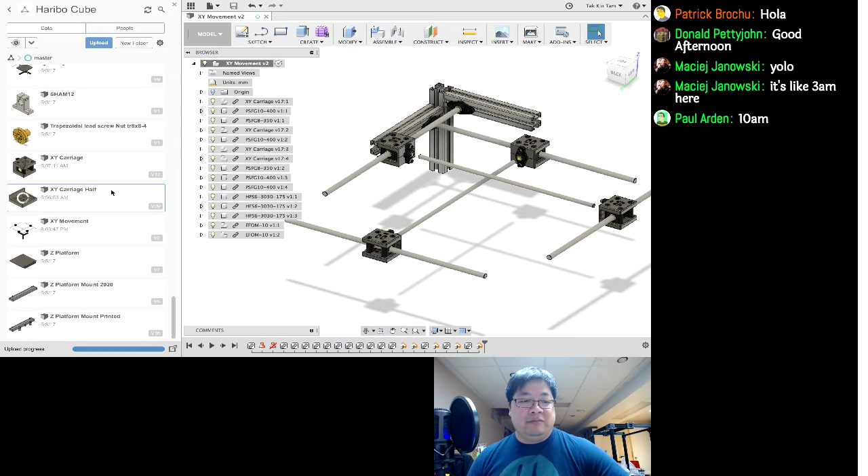I'm hoping that I'll get everything sorted out for Saturday. I made a lot of progress on the design, so hopefully by Saturday, if I can figure out the rest of the problems I've been having, then we can actually see some animations. Saturday would be noon, so it works out for you guys since it'd be dinner time for you, and noon time for the North American guys. So hopefully I'll be getting you guys a better update on Saturday.

One change I did make is on the CSS for the moderators. You'll notice Patrick is a moderator here, so his name is now orange instead of blue. It was dark blue before and you could hardly see his name when reviewing the stream, so I decided to make it orange so it stands out better, hopefully that works.

Let's see if I could have a quick check on who's on. Five, I think that's pretty good, I guess. Didn't really expect too many guys on because it's just kind of a spontaneous stream, right?

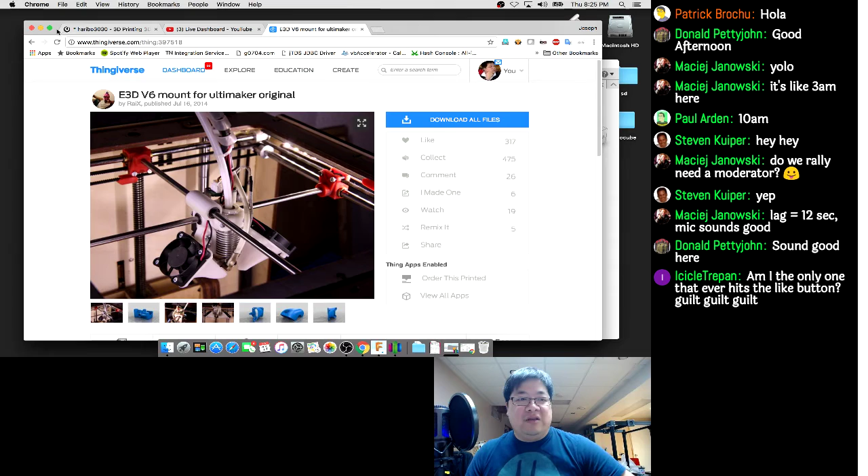I did a lot of work on this last day too, but now that I've started test fitting, I'm finding I need to make the part smaller to get the clearance. But let me go and show you guys what I've done over the last few days.

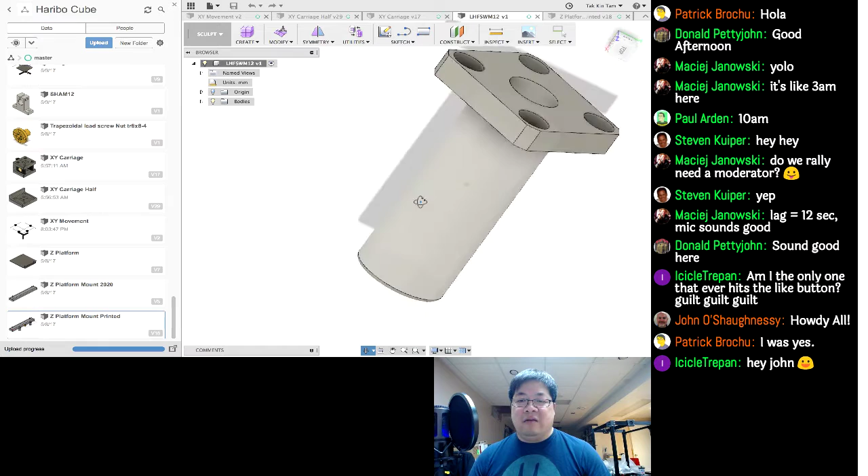I think Pat, or maybe someone else, was asking last time about the bearing on the Z platform mount—specifically about the single length ones. I haven't had time to adjust this yet, but basically we're going to go with this 12 mil double-length flanged bushing/bearing to replace these two.

So the lead screw, the pom nut, and the two bearings are going to be flanged, and we're basically going to use the flange from the bottom to hold the platform up. If you guys look at the MK2 design...

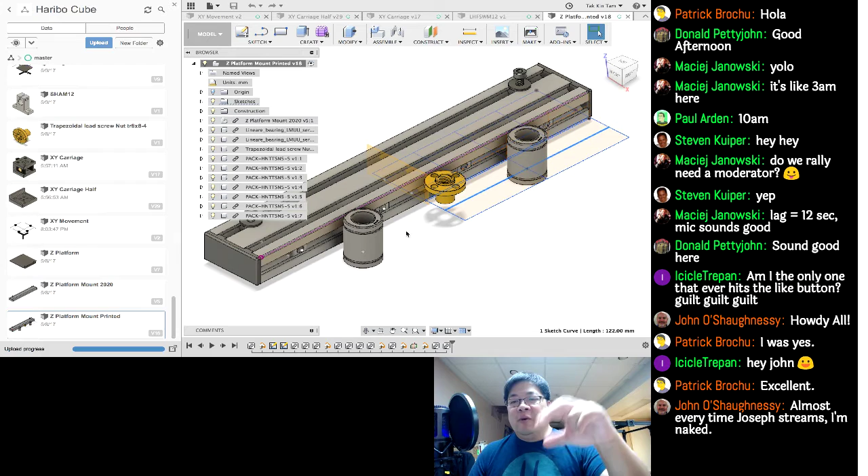John, you're killing me. The MK2 design basically has the bolt going through the top and making contact with a nut, so all the weight of the gantry gets forced onto the two bolts holding it up.

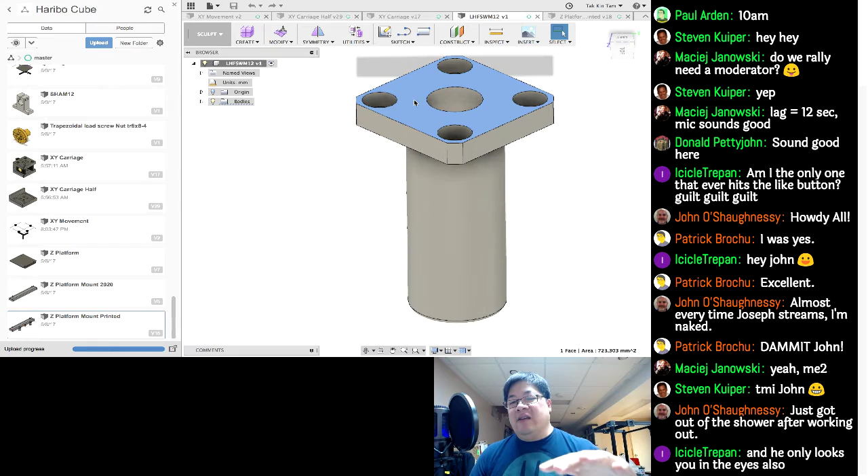In the case of the gantry on the MK2, it's not a big deal—it's not that heavy. But when you have a platform with the heat bed and the weight of the print, just having the bolt on top doesn't really make sense. So what's going to happen is we're going to flip that around, and if you look at the bearing itself, the platform is going to sit on top of the surface so the weight is on the flange, and gravity keeps it in place.

If you think about how the platform works, it starts from the top and slowly descends as the print goes on. So with the flange on the bottom of the platform mount, it's going to hold up the whole platform a little bit better than having it pulled up from the bottom. Right now we have a proof of concept and it seems to work—like I related in our last stream.

I just want to quickly update on the bearing situation. I ordered the bearings from AliExpress just for fitment—most likely it's a fairly standard size, so there's bushing that works in that space as well. It's up to you guys what you want to use, but the mount is going to work for all the different options we have.

So that's the update for the Z platform.

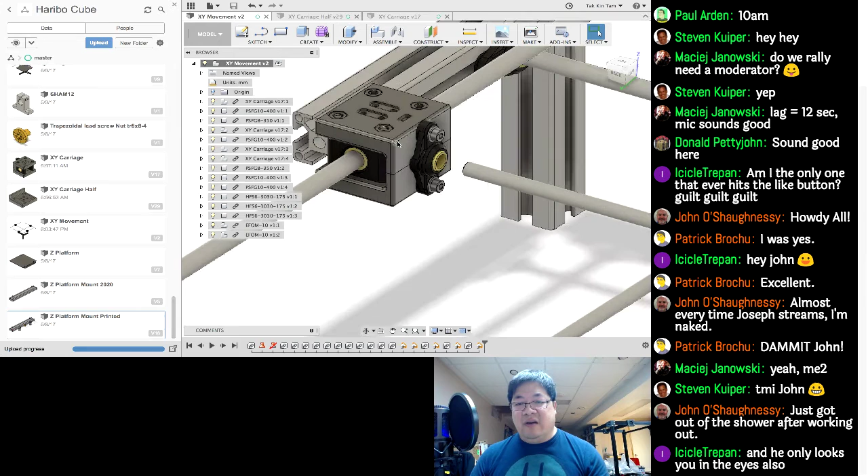I want to go through the design of this, it's going to change. One of the things is I made this part here, the XY carriage, I'm calling it. I drew that out of context, meaning I designed this part first, other than the Z platforms. So I sort of just winged it and said, I like these Misumi holders.

The little ball inside the brass colored ball pivots, so if there's an alignment issue between this ball and this ball here, it will work itself out. So that rod, if the printed part is slightly off, it will still work. It won't bind. That's one thing about these.

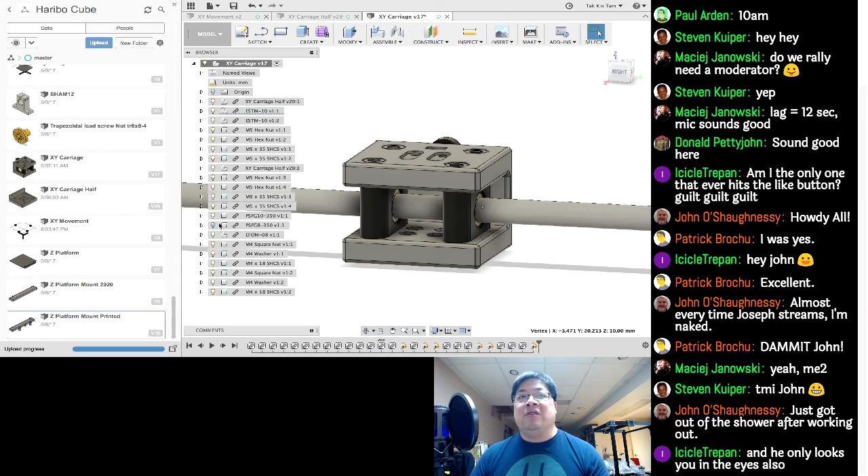The other one was the cross rod. The cross rod here is also on a pivoting bushing. So if that is not perfectly perpendicular, let's say we're off by...

Hey, see you later, man. Yeah, catch up later, it's gonna be recorded anyway.

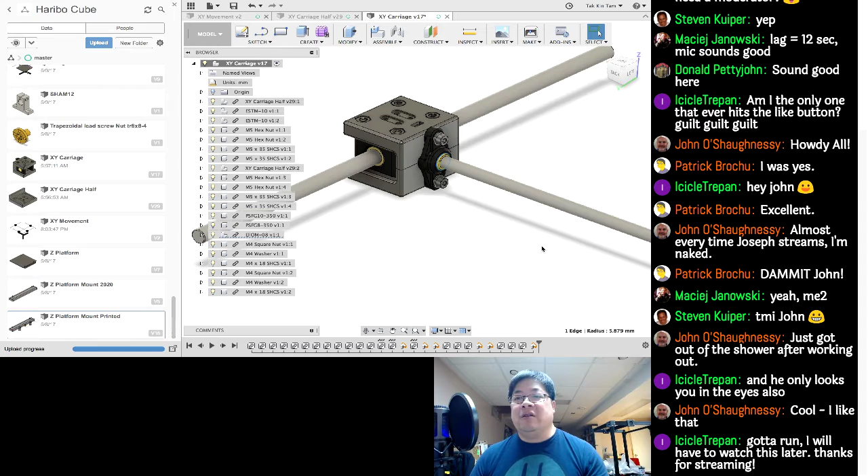So if this rod is not perfectly perpendicular to each other, we're talking about maybe half a degree off, we're still pretty good here.

One of the things with any kind of these ultimaker movements is their major problem is there's too many variables. This rod, I'll show you the picture, but this rod and the one across from it has to be parallel.

The two opposing ones have to be perpendicular, the two crossbars have to be perpendicular, and a lot of times there's gonna be spots where it's not perfectly aligned. Then it starts binding up, and there's a lot of time wasted trying to align all these different moving parts. But by using these pivoting pillow blocks, we sort of move away from that.

So let's just go and hide these rods. You notice that it's a fairly simple part to model. What I did was I made two indentations so that they align that pillow block in place.

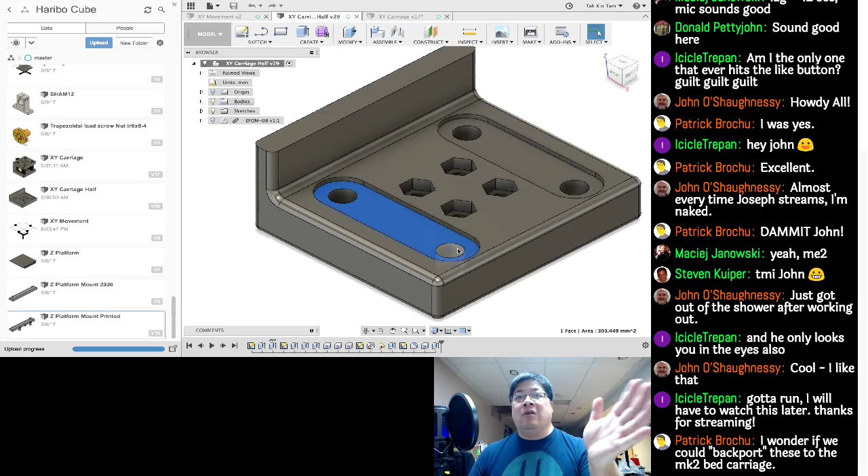One of the problems is they can't make the hole of the bushing holder perfectly 5 millimeter, because then when the bolt goes through it, it'll bind up. So they make it 5.5, which gives about 0.25 play in the bolt itself. If we don't have these alignment indents, you could be going either way, 0.5 millimeter either way. We solve that problem by having the indents to align the blocks themselves.

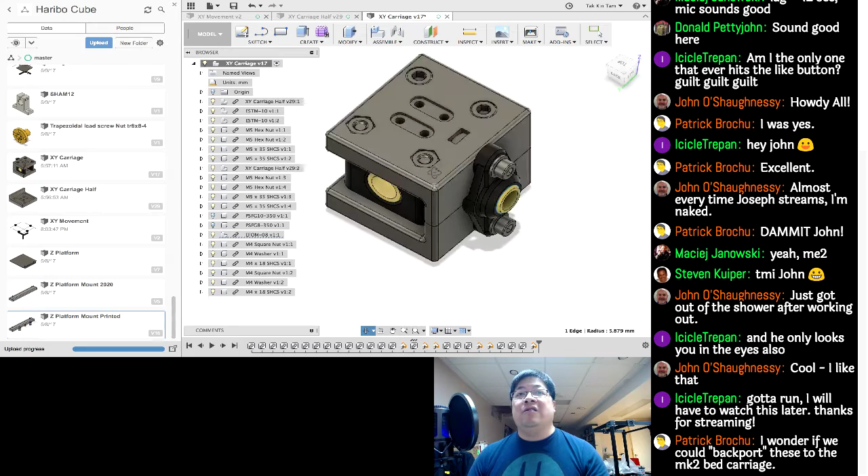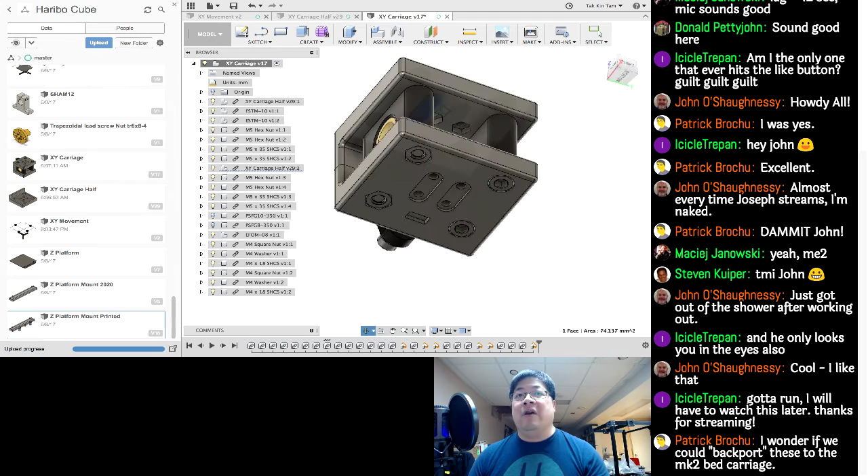The other thing you might notice is on this side we have nut traps, and on the other side we have counterbore bolt holes. That allows us to use the same part. If you look here, the bolt corresponds to a nut on the bottom, and the nut here corresponds to the bolt on the bottom. So that allows us to reuse the same part for the top and bottom of this clamp to hold the bushing holders in place, using the correct bushing holder depending on which axis you're on.

So if you look at the XY movement itself, we have 4 XY carriages, and each one of those are half - top half and bottom half. You could print 8 of these off the same STL, so I don't have to make a special top, bottom, left, right carriage, and there's no orientation issue. When you put it together, it doesn't matter which direction you put it, it still works regardless of orientation. It cuts down on the spare parts count too, because the halves work either way.

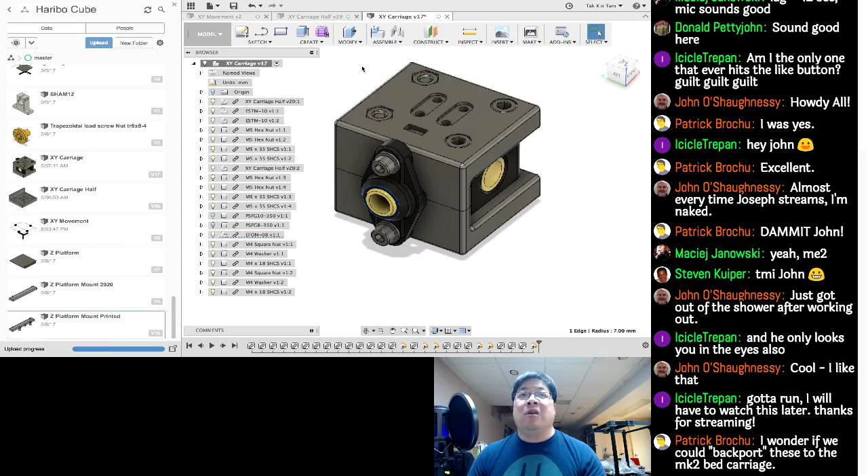The other thing is the bolt hole for this bushing holder here has a nut trap, and that square nut trap is the same for top and bottom. So we end up with this bolt lining up perfectly with those two, and one of the things that I guess will change because I'll tell you why the problem in a second.

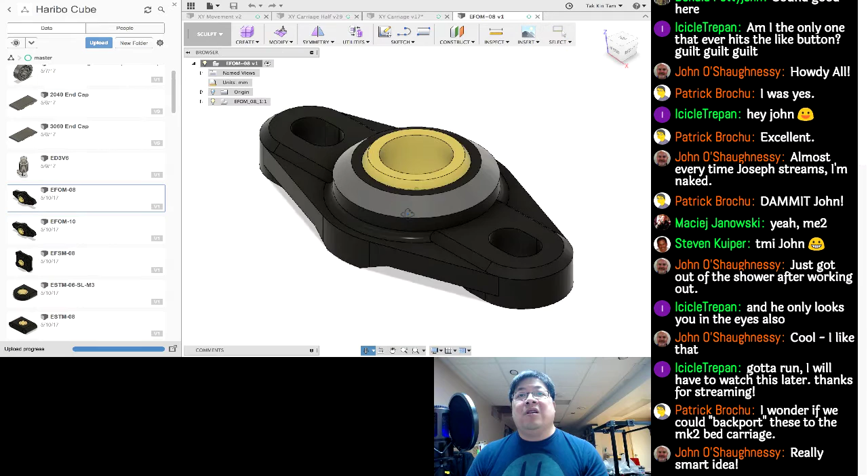But if I hide this one, you'll see that one of the issues is... I'll bring up this one. One of the issues is going to be that this bolt hole and this bolt hole is oval.

And the problem is that these two are not going to be able to line up and down. So I'm trying to see if there's a way to notch this. How would I try to explain this?

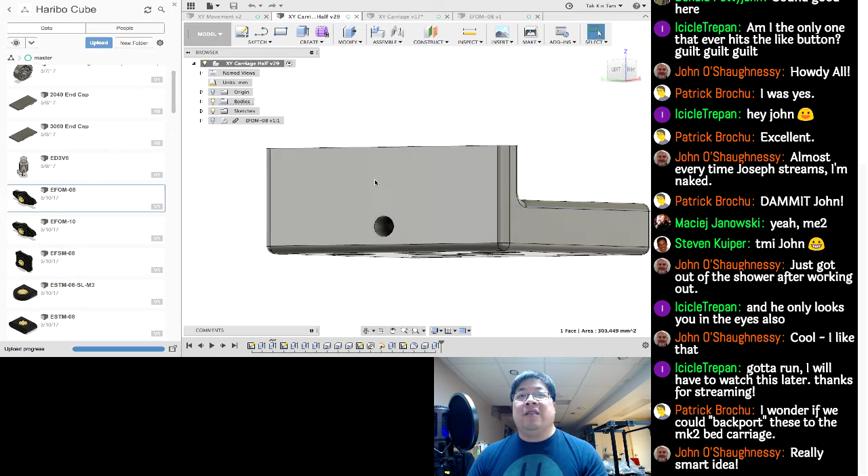So you see that in this one, I have these indents to align that pillow block, but unfortunately I can't get the same indent in this piece here because... oh, come on, there you go. I guess I could, if I really wanted to, use these two surfaces as indents.

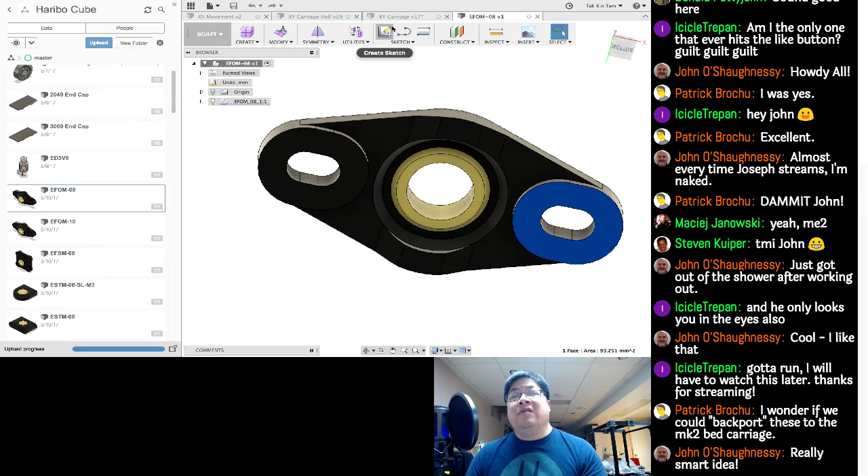This side, this surface that's highlighted is the flat side that we print on, so it prints vertically this way. I wanted it to not have too many overhangs here. So if I use this surface as the alignment, I would have to put a hole here.

That's going to require support, so I kind of wanted to keep that smooth. So I got to find another way to make this align better. But right now I can tell you that most of this design I can reuse.

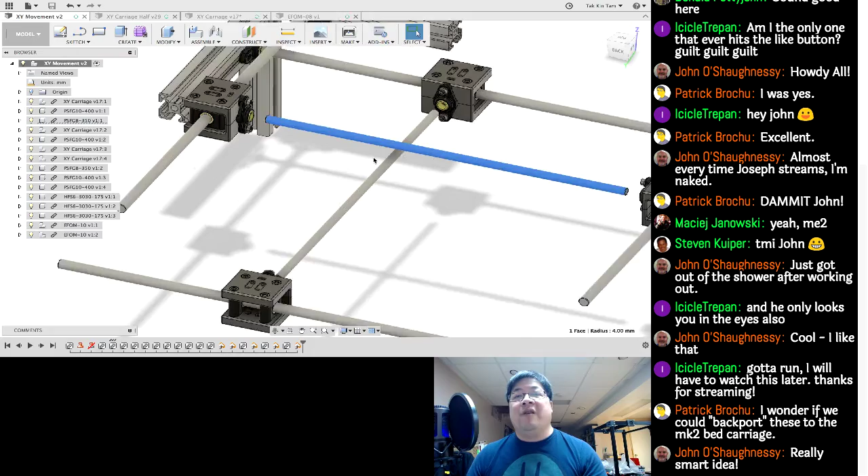But it needs to change because if I go back to the XY movement here, the problem is after I start laying out the rods, some of these rods are not long enough. I'll replace those in the next demo. But the problem is these carriages, they look nice, but they're way too big.

Because when this carriage gets to the end here, this carriage is not able to get to this end because this is too thick. I need to make this thinner so that they would pass under each other.

One of the things I was thinking of doing was moving this whole system down to give clearance. But the problem is then the distance between these two cross rods will be too high. Right now it's already sort of high, which I didn't really like.

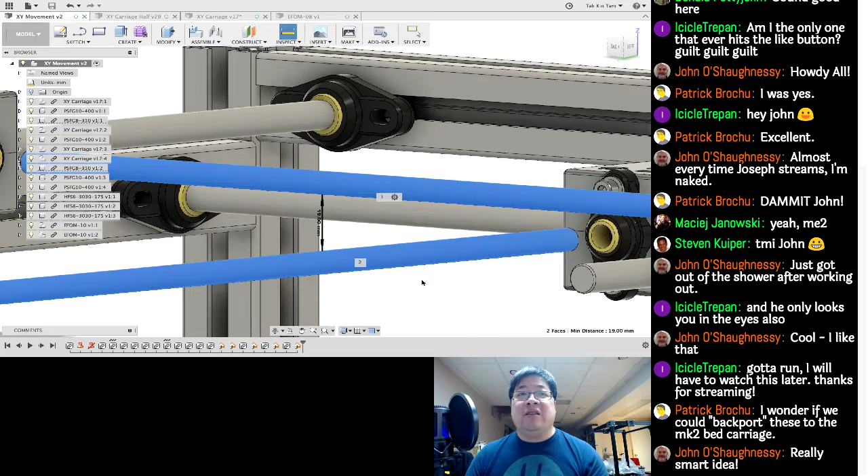If I look at this here, this is already 19. The distance is already 19. So if I make the lower rods any lower, then I end up with a really tall spider. And the problem is that the E3D comes after the end of that spider, somewhere like that. So overall, it's going to be like 50, 60 tall for the spider. So that's not going to work.

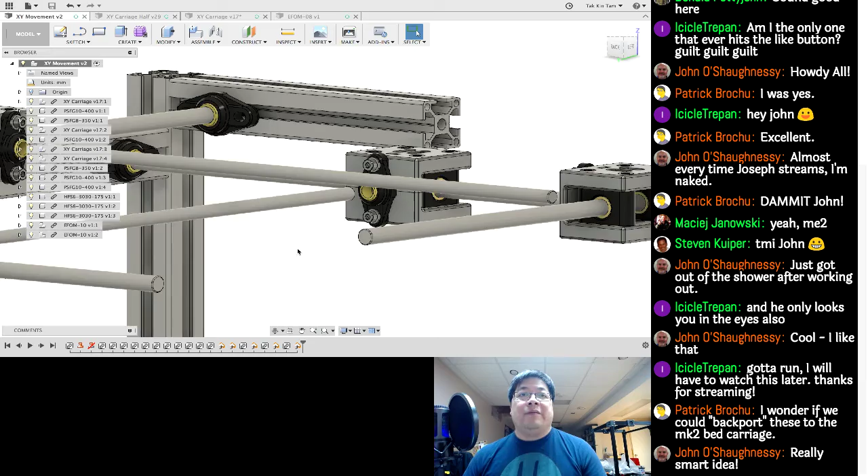So I guess one of the things that I learned from my trade, I work as a software developer, is that this is not a real failure, because what's happening is, like I mentioned in our stream, I anchored an idea. The idea is the frame. I anchored the frame last stream.

Started laying out the rods, made sure that everything works. Then I started working on the XY carriages. Now that I got to the XY carriages, I found that the clearance issue comes up. So all I have to do is have another iteration of the XY carriages to make them thinner and more streamlined so they could pass over each other, and then decrease the distance between these two rods.

If I didn't go through this whole effort of modeling these blocks out, I wouldn't know that there would be an issue. But now that I know how to solve it, I could go back and redo these blocks.

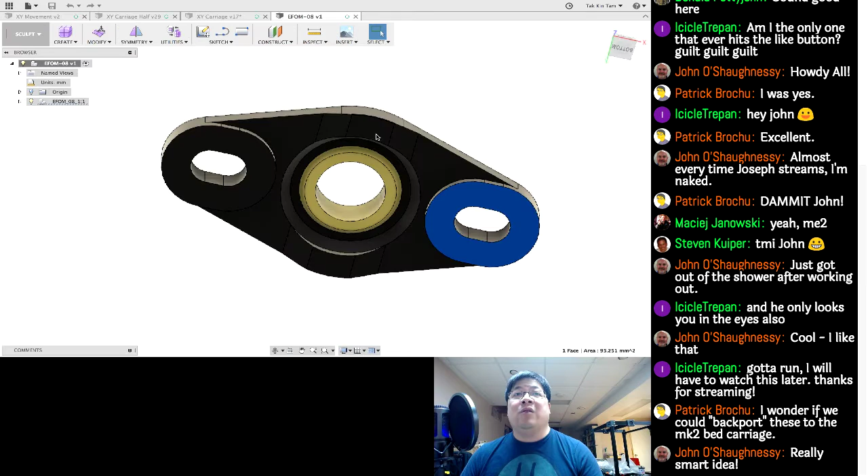The rest of this looks pretty good because what I need to do is actually make adapters that will sit behind these two pillow blocks, so that the rod doesn't move. There's a backstop for the block because if you look at the bushing holders themselves, they're open in the back, so the rod has a chance to move, to slide in and out of that holder. So what I'll probably end up doing is printing a simplified plate that basically backstops that rod from shifting, and it should be fine.

That's a very easy fix.

What I like is the fact that I could orient these horizontally and use the groove to do the mount. So those will work pretty good. I think I like that.

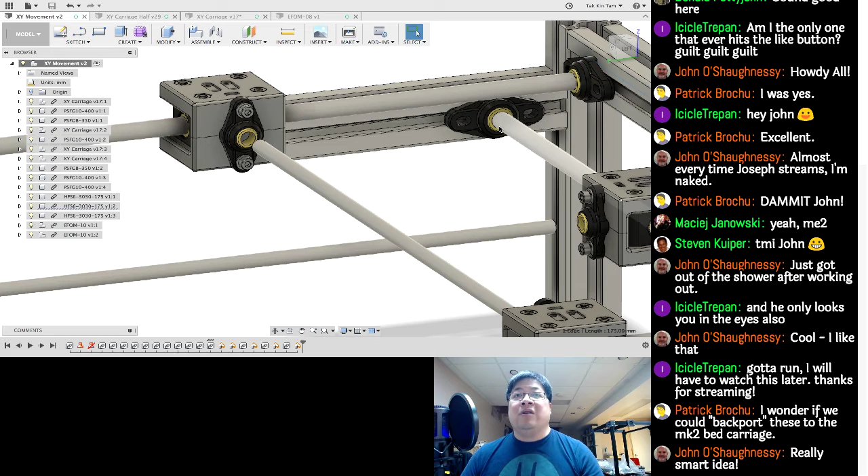A lot of the other guys are using some sort of round bearing and building printed mounts. I think this is a good off-the-shelf solution to use for this rod mount here. This is a 10 mil one, and I use the same series. Basically, this is the 8 mil one.

So borrowing this idea where I'm using it for the horizontal orientation, I'm probably gonna have to redo this block to make this rod holder horizontal. So if I make this horizontal, that means I'm gonna have to make the clamshell left and right instead of up and down like this, and not use this series of pillow block.

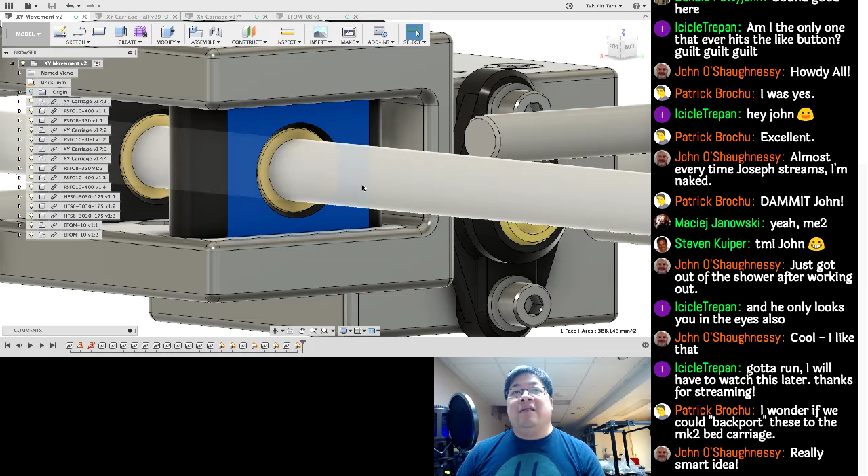Because this pillow block is actually pretty chunky, there's a lot of unnecessary dead space. So we're probably gonna end up going with something a little bit more streamlined.

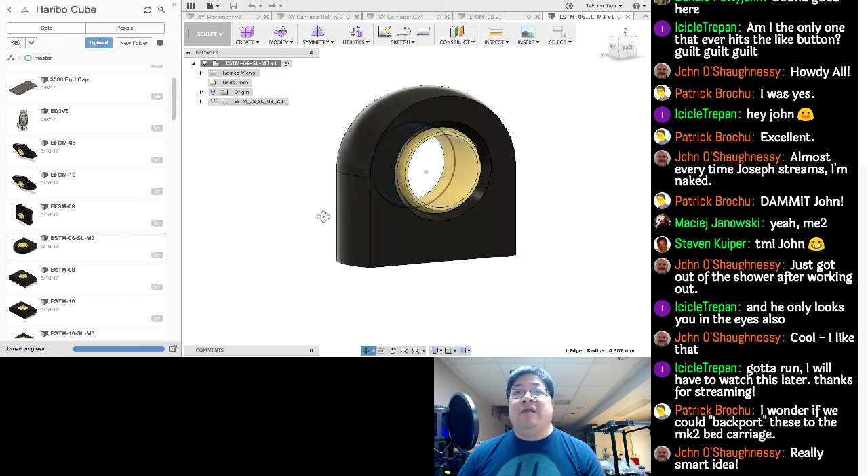I was looking up the different ones, and I think I'm probably gonna go with this one because it's pretty streamlined. Same pivoting ball, except very small compared to the other one, and I only need to mount it single sided from one end. I'm getting samples to try on this one, so I'm gonna see if this works.

The nice thing about it is that I have this cavity on the bottom, so I can actually make an alignment block. Basically, the alignment block is gonna slide in here, and then these two M3 holes are gonna hold it in place, and that'll work pretty well, I think.

So I kind of have to redo the whole XY carriage with this, but it shouldn't take long. Probably one night I could actually get that done.

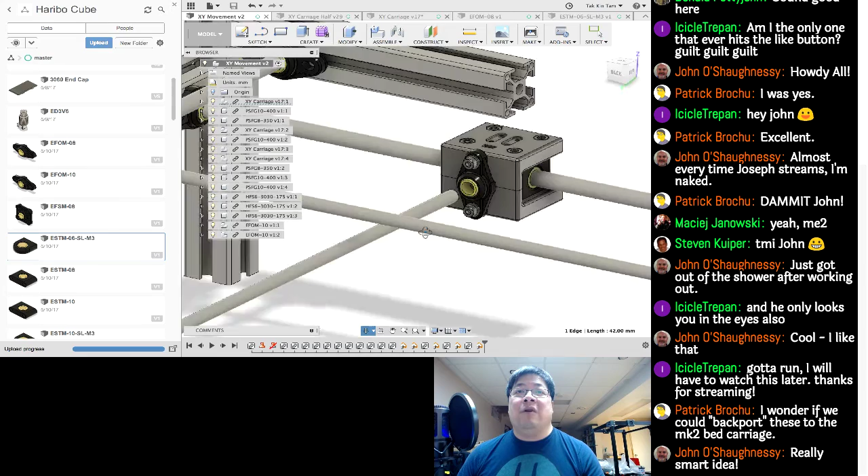So with that iteration, I probably end up replacing these XY carriages, and then raising this whole carriage up to meet better than 19 millimeters here, and start working on the spider.

I've been trying in the last few days to learn how to animate this so that I could drag the spider and start showing the movement of the XY carriages. Hopefully, I want to get that done for Saturday, so a big review, show and tell.

I think in the last few days I've been spending a lot of effort making a lot of progress on the design.

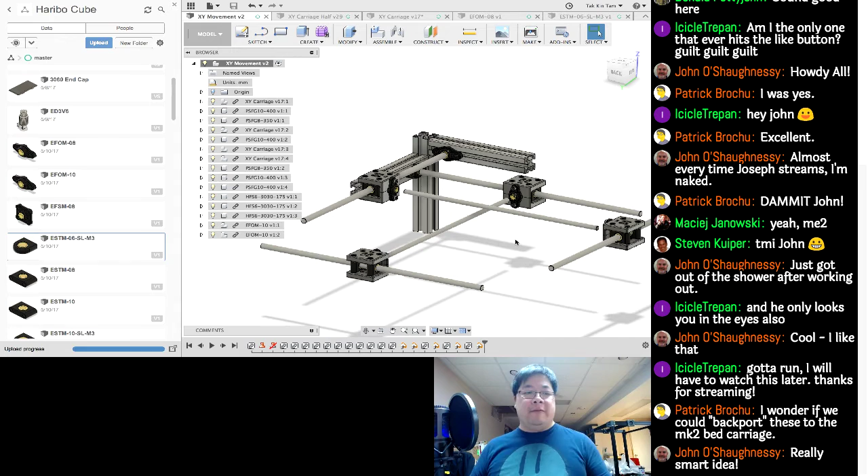Oh, hang on, I gotta... I guess I didn't plug the other camera in.

There you go. So printing the last part for that order, the red Haribo 3030 order. I'm kind of running low on the filament, and I told the guy I probably won't do

the gantry parts if I run out, because it's getting close, and this X carriage is taking a little while to print. Hopefully he won't mind because he'll just have to reuse the X ends. Everything else I printed already, even the LCD cover.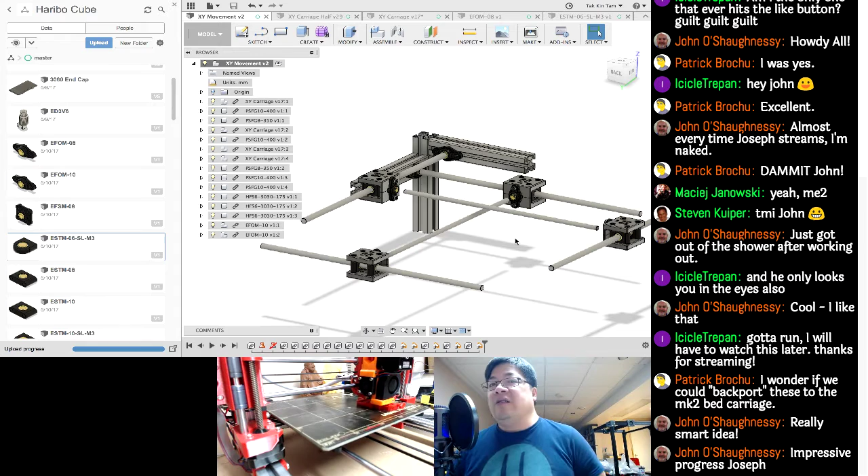Yeah, I mean, I think when I was putting my mind to it, things started to kind of fall into place.

The whole library of the igus stuff, like this is a 10 mil one, so you can kind of tell it's a little bit bigger than the other one. We didn't need this one because it's sort of beefy compared to the 8 mil one.

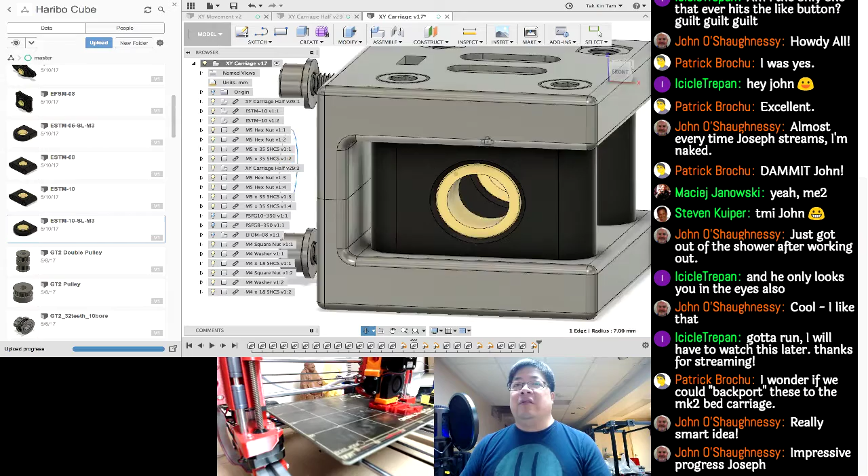So I think the idea of going through and using the igus bushings for the majority of the bearing locations makes sense, mainly because it's already made. It's like $5-6 for a pair of these. I think maybe it's like $7-8 for a pair of these.

So if all the money you're gonna be spending is gonna be up here, no doubt about it that's where the most important part is. Once you get this part correct, you vary the length of this piece, and basically you have as tall a printer as you want.

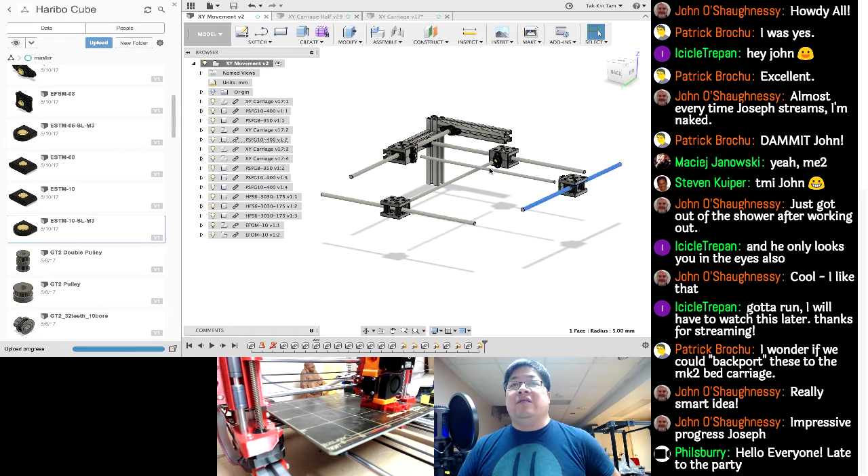You vary the length of these rods and the length of these cross members, and you have as wide as you want, up to a limit. There's obviously some limitations, but because we're using 10 mil rods, I could probably say we could safely go up to 450, 500 across for the 10 mil rods. If you guys are really pushing it, you probably could go with 12 mil rods, and then use 10 mil rods on the inside.

That's just insanity, really pushing it. So I think 300 by 300 for the XY and then 350 by 400 for the Z is going to be the de facto standard for the Haribo Cube.

If you guys want to make a Cube XL, we probably could. It's fairly simple, I think, for the crossrods. If we kept the same idea using a holder, you just swap this holder for a bigger one. Hopefully, I got to check if the offset stuff is going to be correct, but it's not hard to remodel or parameterize that carriage anyway. And then the rod holder for the end, those are easy too.

So it's easy when you start to use off the shelf bushings versus trying to get round bearings and building all sorts of funny contraptions and clamps and stuff.

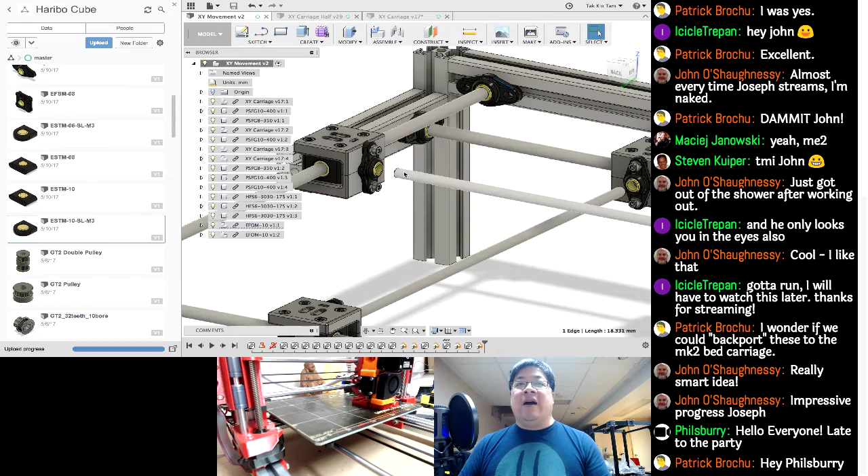I got away with not having to use a clamp for this rod because they sit within these two sides, and just by virtue of there being two carriages holding them together, I could get away with not clamping them down. They don't need to be clamped down anyway—they could spin freely in there, as long as the spider moves freely along these two axes. So we're good with that.

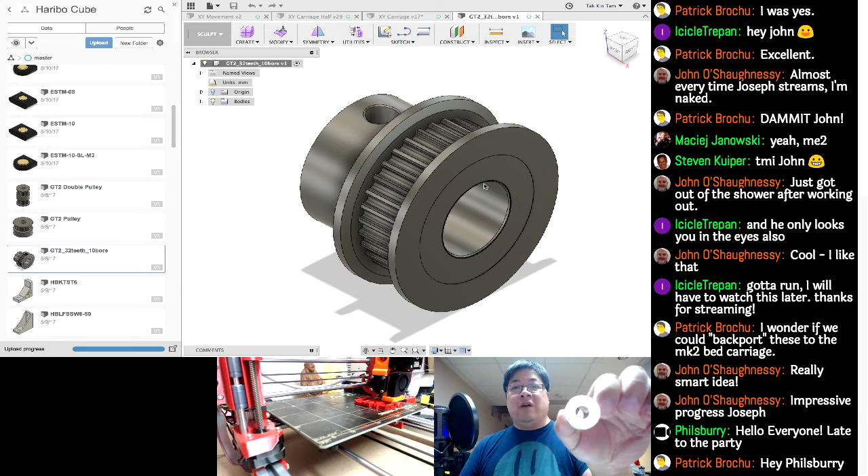Now I remember the biggest problem we're gonna run into is getting these—remember I showed you guys the 10 mil bore GT2 wheels? You're not gonna find these in 12 mil. I don't think they make them in 12 mil bore. So that's gonna be one of the issues, finding a wheel that will work.

And you see how big this one is—that will take away from the clearance we have here when we actually mount the motors, because the motors will take up some space as well. So it'll be interesting to see where we put the motors to fit that problem.

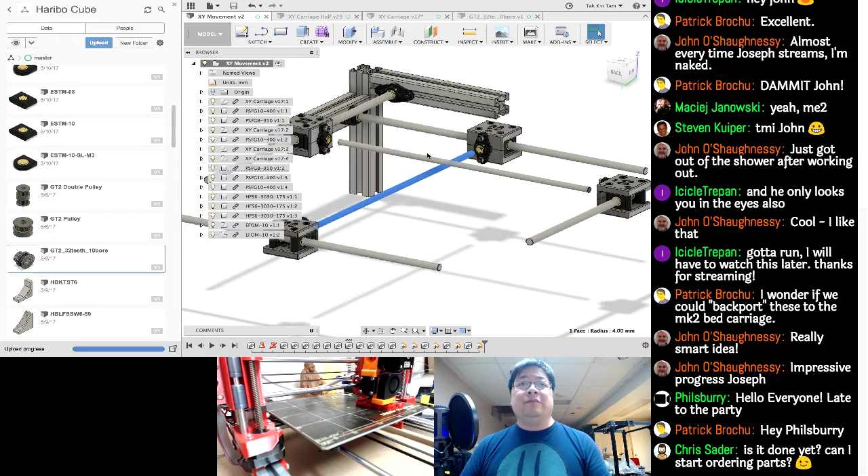I really don't want to rush too much on the design, but I'm just kind of showing you guys as I learn how to work my way up through the different breakdown of the parts.

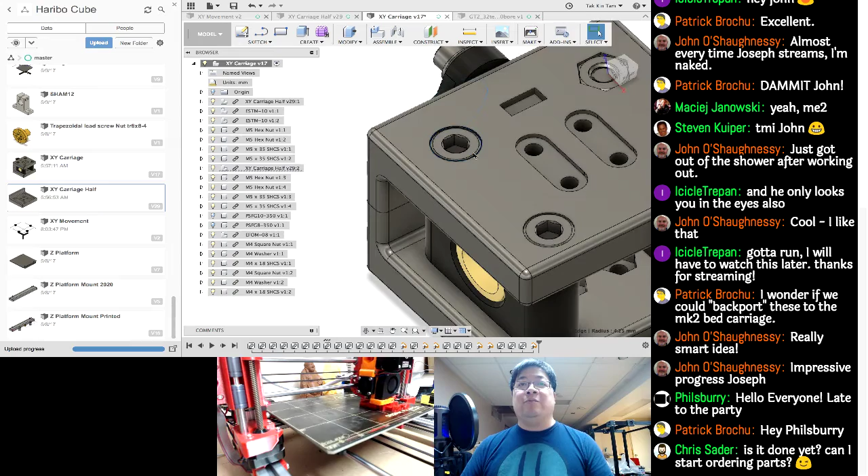Just to recap, we went through and looked at the XY carriage halves, which I showed are asymmetrical, and then we assemble them together. I was making sure things like these bolts and the nuts are correctly positioned so I can see if there's any clearance issues, and even down to the washer.

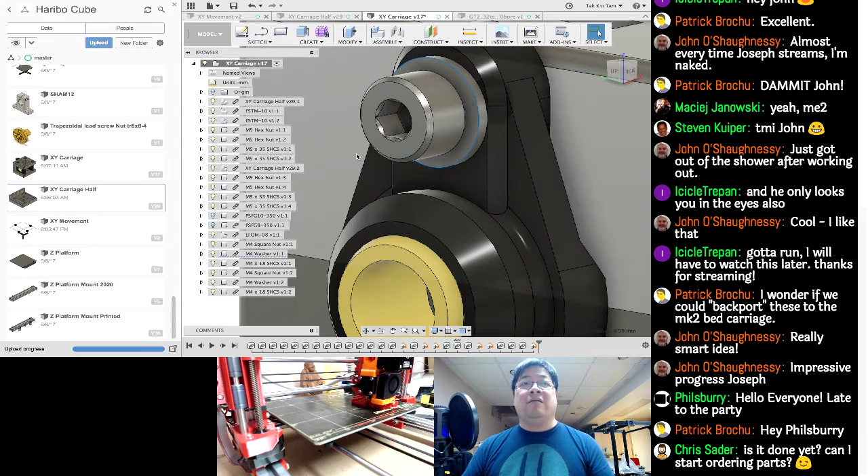I was making sure these parts have a washer in them, and I can show you here—just take one of these washers away.

Yeah, you see the problem I was talking about before, where this bolt is sort of in this slot, so it's not really aligned. You know I'm kind of nitpicky about that—I want to make sure the bolt is aligned and there's no guesswork in its position. So this part was kind of rushed and I need to work on that, but it's a non-issue now because we're gonna redo this whole part anyway.

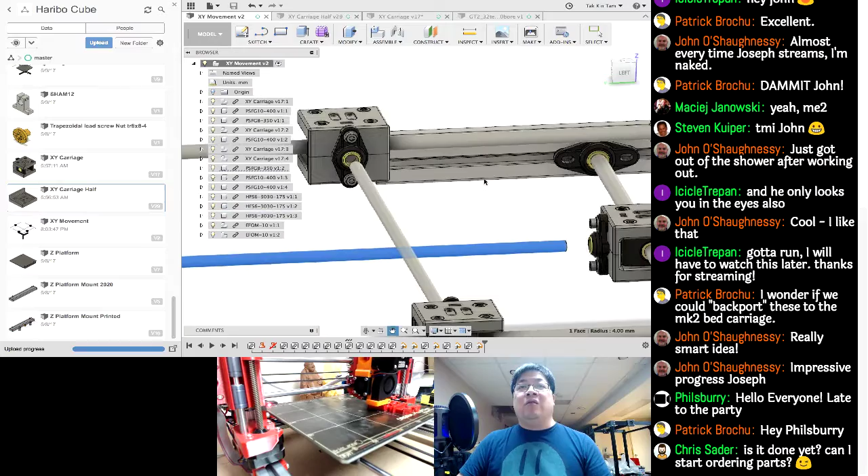So, because of the clearance issue here—some of you guys were asking me to share my thought process as I'm going through and building it, and I'm just verbalizing everything going through my head right now, so you understand how I think about it when I design and build these.

I guess today's Thursday, almost 9 o'clock, so probably not going to work too much on it tonight. This weekend is kind of like Mother's Day, a lot of things happening—going to my in-laws and stuff. So I'm gonna try to do some work tomorrow morning and afternoon when I get off work, to at least redo the XY carriages, since those shouldn't take too long.

Redoing those and then updating this diagram so that it shows the clearance is good to miss the two sides, and then I think I gotta start thinking about where I would mount the motors.

On one of the guys' designs, instead of mounting the motors high up, I guess that's where most of the weight is gonna be distributed. He had a really long belt that went all the way to the bottom of the case, and the motors are basically mounted on the bottom of the enclosure. One thing I didn't like about that was you have a lot of weight on the bottom, which is good, but the belt is going to be a nightmare to tension vertically.

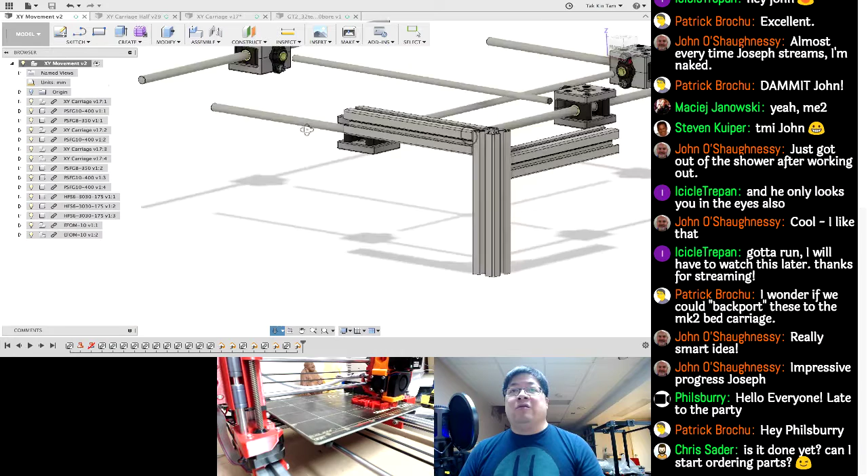So I think last stream I also mentioned, don't let this cutout fool you, right? This member here goes higher. So you'd probably end up going like, maybe I just do that now. I'm just gonna fake it by putting another piece there.

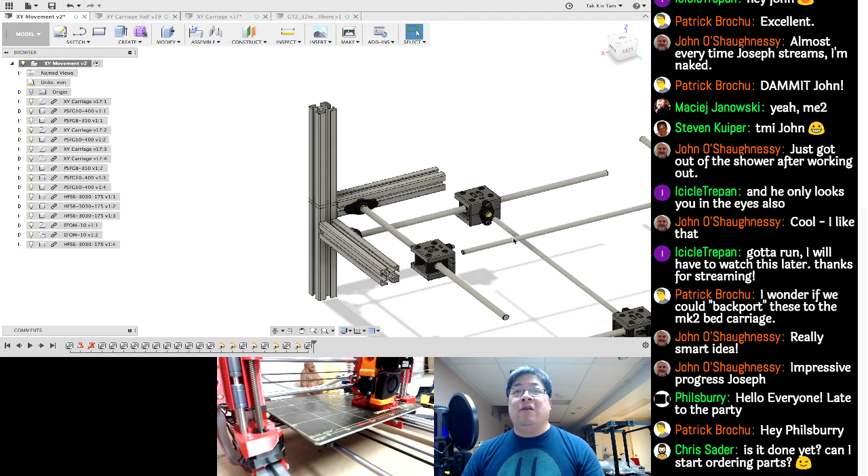Because what I said last time was that you need space up here for the spider, and your filament is going to need some space to come in and do a gentle bend into the extruder. So your enclosure is probably going to be another 175 millimeters taller. The ceiling is going to end up here, and there's this space on top of here and here.

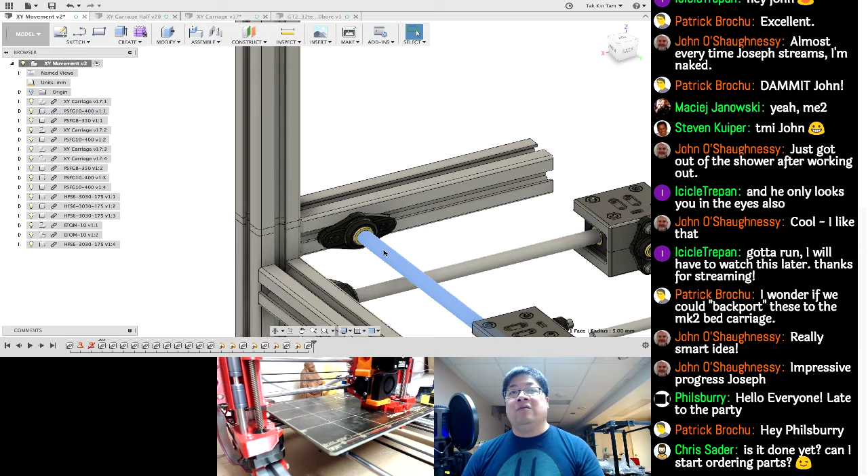So most likely what's going to happen is I'm going to put the motor here and drive this axle, and put the motor here and drive this axle, so that only one corner of the enclosure is going to require some adjustment of the panel that goes into this groove and this groove. The rest of them will be full panels.

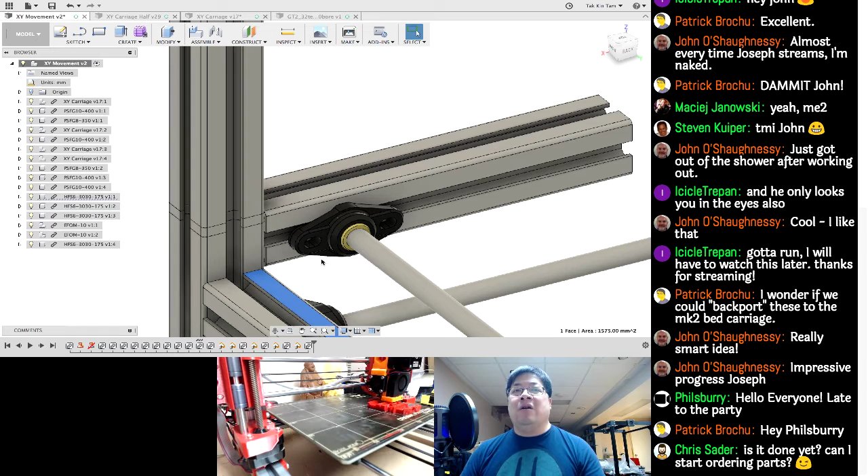It's just these two, you're gonna have to compensate for the motor, and because I think Phil was saying if we make the motor sit on this extrusion and this extrusion, it acts as a heatsink. That's a good idea, so I'll probably end up somehow making it so that it would transfer the heat to these two. Not sure how we'll do that yet, but we'll cross that bridge when we get there.

I think that's it, let me just save this so I don't lose it. Fusion 360's been acting up a lot lately, I think it's a lot to do with all the edits I'm doing. Every time for whatever reason, every time I move something, it wants to do capture position, and it's making this really complicated. Hopefully it's going to be able to take care of that.

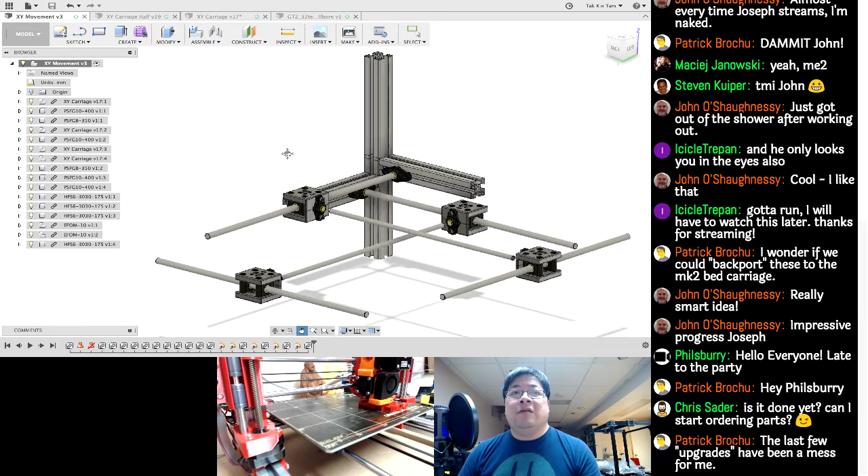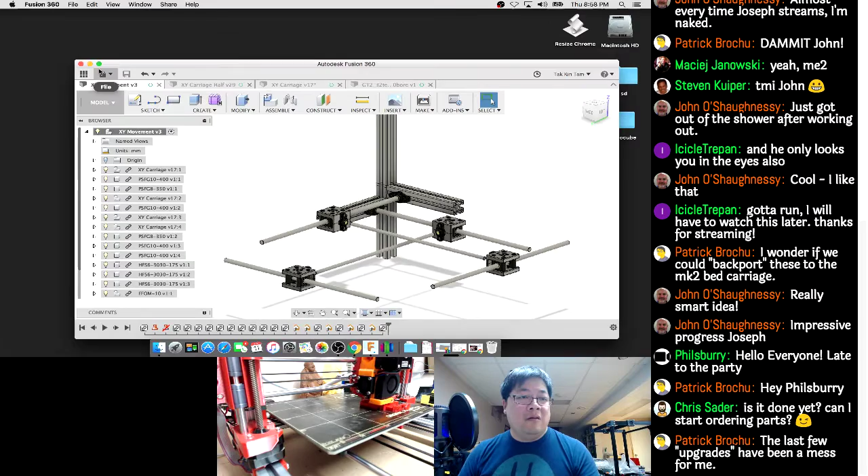There's something I wanted to cover, maybe not, maybe that's it. I think I'm gonna go and minimize this, and let's bring back up this one. Okay, let's kind of talk about this.

Yeah, the Fusion 360 last two updates have been shit, to use a better word, because I lose the rotating cube thing that allows me to center the view, and the shift middle mouse button rotation just goes erratic.

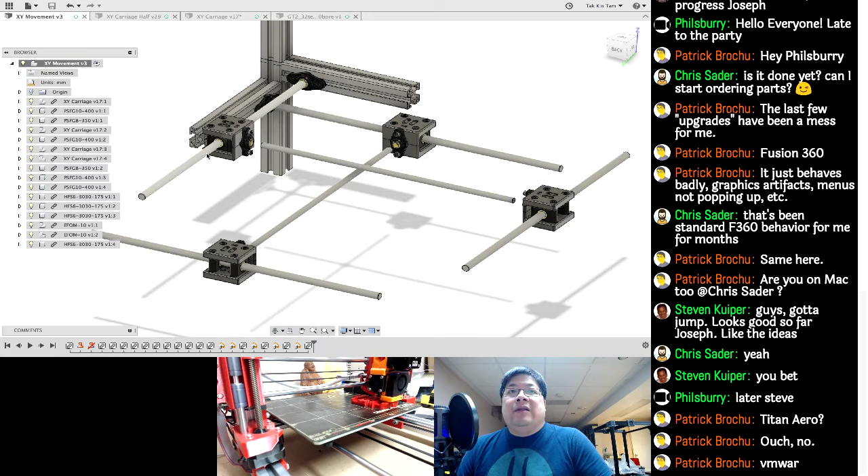If I maximize this so we can see what I'm talking about - one of the design choices we could make last time was the cargo container crane idea. So the beauty of this XY carriage is that it still allows us to do that, right? If we move like... let's see.

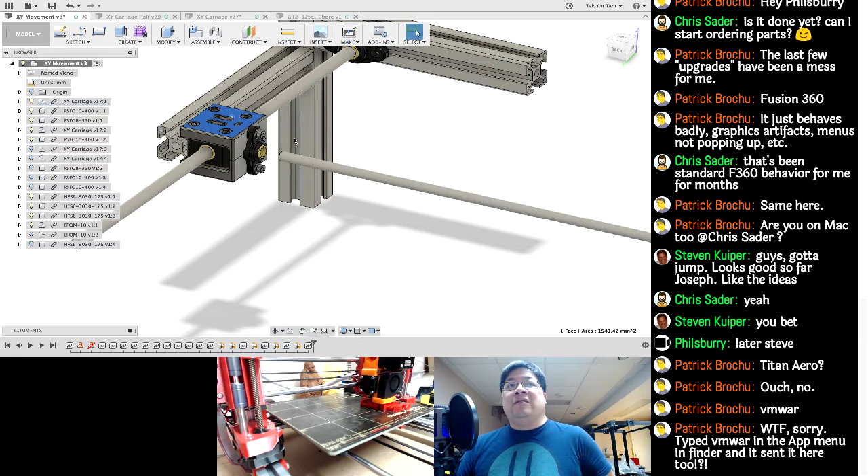That one, get that one, remove that, remove that. There you go. So if you think about it, if we remove all of that and put back this one - if we adapt this XY carriage to have a double bar, like how the MK2 is, this whole thing can move back and forth like I said, like a cargo container crane, and then your X carriage moves along here, and we could change this piece here to mount the X motor, and this design still works.

So, if worst comes to worst, and we want a fairly high efficient layout for a large format printer before we get to doing the whole crossbar, we could adapt this design for that, and start printing with that first, right? So there's a lot of possibilities with this frame.

As the parts become available, you basically start bolting them on to the enclosure, and the enclosure becomes the printer. That's the short term plan that will get us to the long term goal of a large format printer. Hopefully it's going to be an interesting journey.

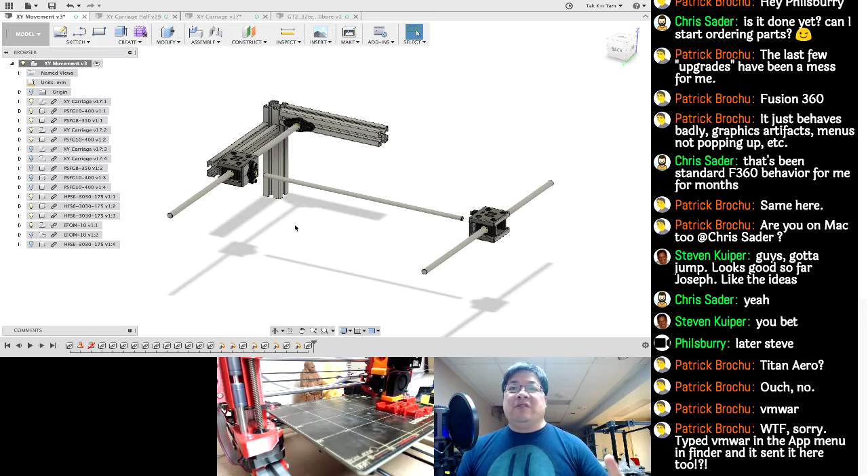If you guys think about it, we get usage of the enclosure now. We get all the panels cut, the rubber seal thing I showed you guys last time to mount the panels. It's gonna look sweet. We put the printer in there, getting all enclosed, and you guys can all pimp it out with LEDs and other stuff.

Then as I start building the gantry pods, you guys go and start to print them and test the movement, making sure this thing on top doesn't interfere with your printer on the bottom. You go ahead and wire it up, do the pulleys and stuff, test the movement of the top gantry, and once we work out all the kinks and bugs, we just bolt on the Z platform.

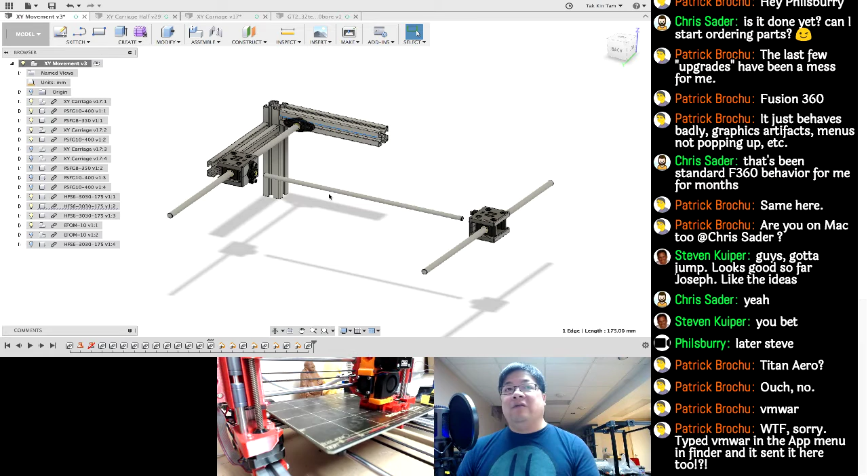And we are done, we have a printer. So I think that is a good plan to go with, and it means we are spending money in a step by step fashion versus an initial outlay of like $1,000 or $800, whatever it's gonna cost. Don't quote me on it, but whatever that total is, we don't have to outlay it all at once. We just buy it over time, and we could work out deals to get these bushings and holders, accumulating parts as we go along in the next few months. So I think that's a good plan.

Then we start to build the BOM, because one nice thing about this is right away you can tell I learned my lesson the first time - I no longer just randomly pick the fasteners. I make sure each fastener I use is in the diagram, and then we can generate a BOM from this and not have to deal with me forgetting whether it's 12 or 14, or do I need a washer, how many of these igus bushings do I need. It's all going to be captured in the drawing.

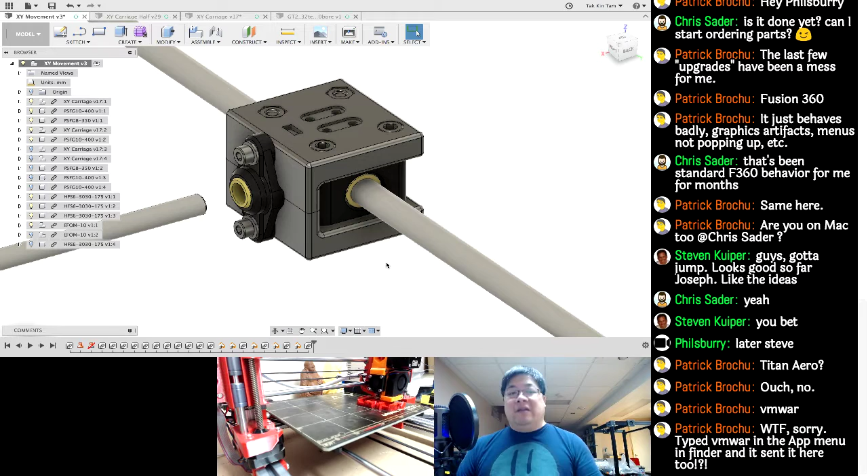So we could take pictures, like screen caps of these assemblies, to show how the screws and stuff go together. There was a whole discussion about 12 and 14 with me and Pat for a while, so that should be interesting.

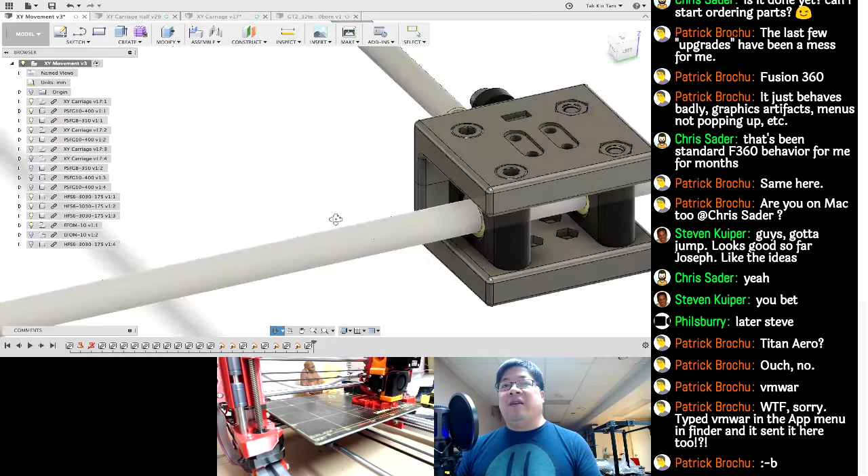One thing I want you guys to direct message me about later: I want to know if there's a way, other than applying an appearance, to X-ray this so I could see what's behind it. Sometimes I want to work on a detail behind this, and I found I'm constantly rotating it back and forth to get to that spot. Let's say I want to put a nut in here, or see that there's a feature here - I don't see it because it's blocked on this side.

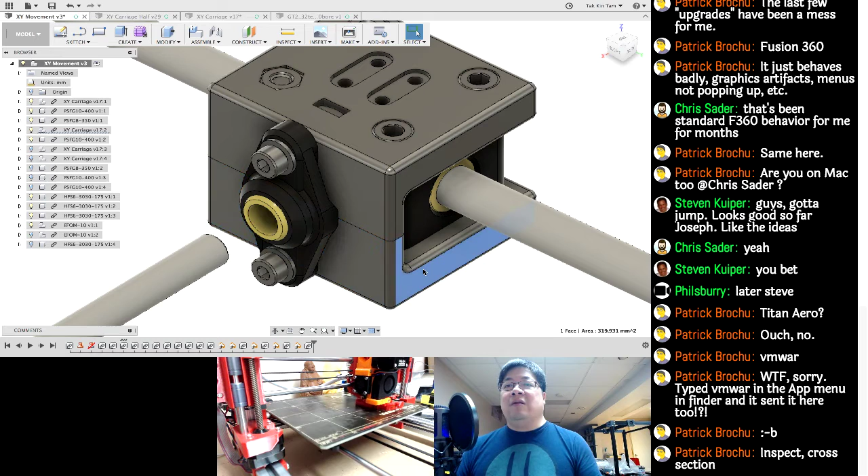I was watching some YouTube videos where they were able to X-ray through this - basically take this body and make it transparent, not hollow, so I can see behind it. But I'm not sure, I'm still new to this. Hopefully somebody will teach me a little bit more.

The other thing is I want to learn how to animate this, like a joint, because one of the biggest problems is this - which one? Like this carriage is imported as a component, as one part.

I tried to do an as-built joint between this rod and this particular bushing holder to have this whole thing slide on the rod, but all it did was slide this back and forth on the rod. So I might be doing it backwards. When I tried to just select them backwards, it started sliding this piece back and forth instead.

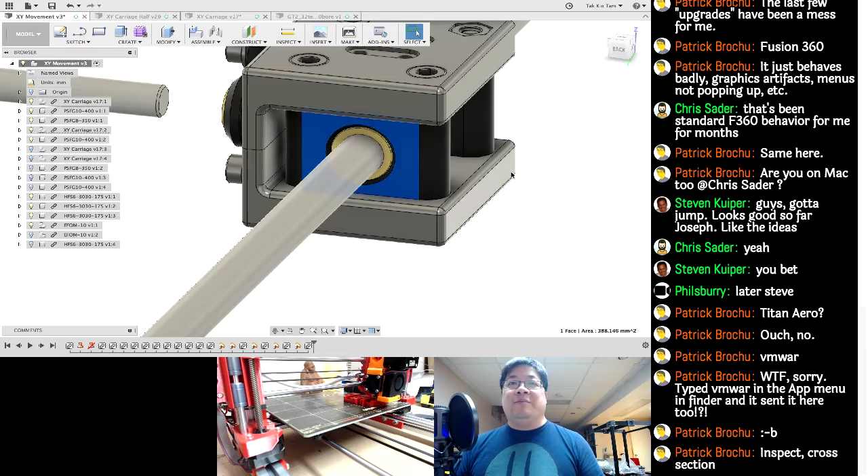So if somebody has some free time and wants to help me with making this whole XY carriage move along this rod and drag the rod along with it, that'd be great, because I'd rather you show me how to do it than me spending 2 hours trying to figure it out. In the meantime I could have used that time to model the rest of this. So if you have knowledge of how to do that, let me know so I don't have to struggle through it.

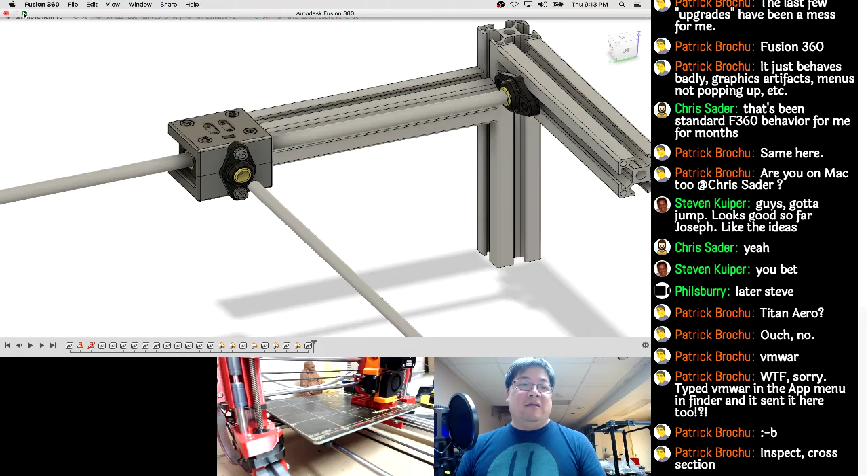And I think with that, I'll go ahead and not go with this. So let's see if there's another one before we go.

Yeah, now we go way back. This is ridiculously looking.

Yeah, it seems like even back in October 2016, see all this weight on this, it just seems odd. I hope you guys are okay with going with Bowden because I don't think this is gonna work, unless we have some really good excuse of why we need to do this. I'm thinking we just go with Bowden and that's it. John, is your Delta Bowden?

Oh yeah, I don't know if you guys can see that, but there's a big gash right there where I took a chunk of the PEI out.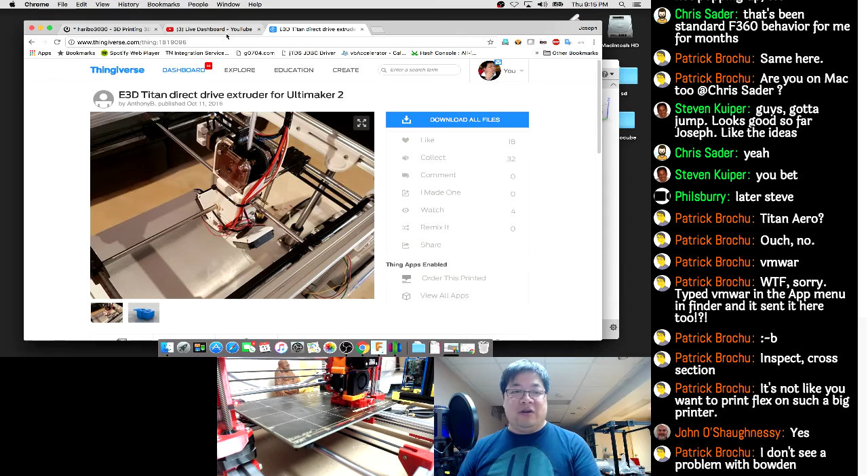Oh yeah, that reminds me, I could show you guys. Now you guys are gonna see what I've been watching because I'm gonna go through my history here. Yeah, it's not on here, but the... what was it? Reality Check VR. I'll find it, but basically midget tone.

Basically, one of the... there was a video I saw this morning. The guy had a 1.2 nozzle, and he was making... oh yes, now I remember, LulzBot PEI sheet replacement. I was looking that up this morning. There we go, that one.

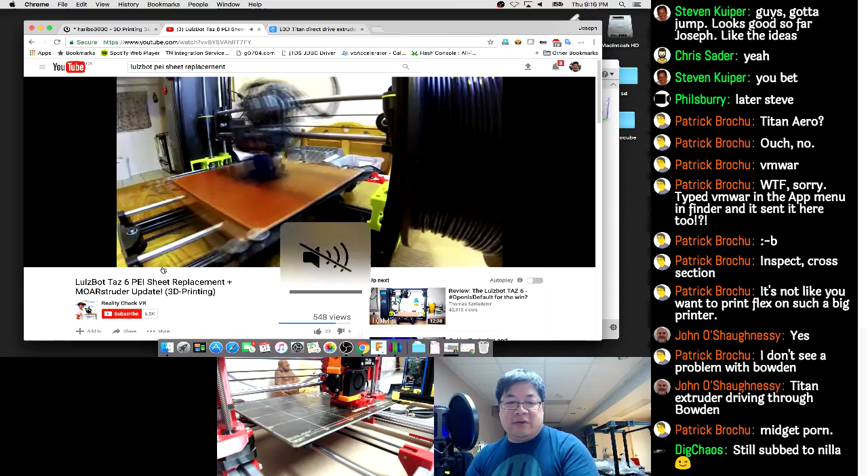I'll turn this down, just guys' music. But basically, let me make this bigger so we can watch it together.

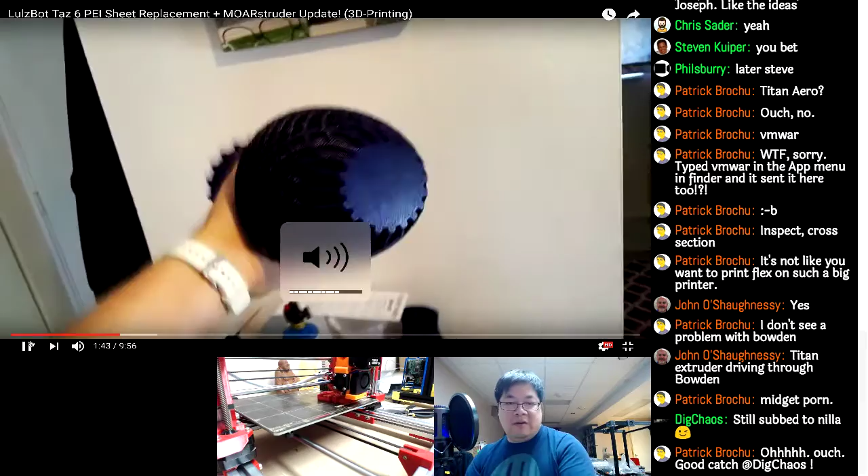About 3.5 hours to print this whole guy. It's less thick and a lot faster because it's got a much bigger heating unit right there, so it can print way faster. For example, I was able to print this guy over here in less than 4 hours. I think it was about 3.5 hours to print this whole guy.

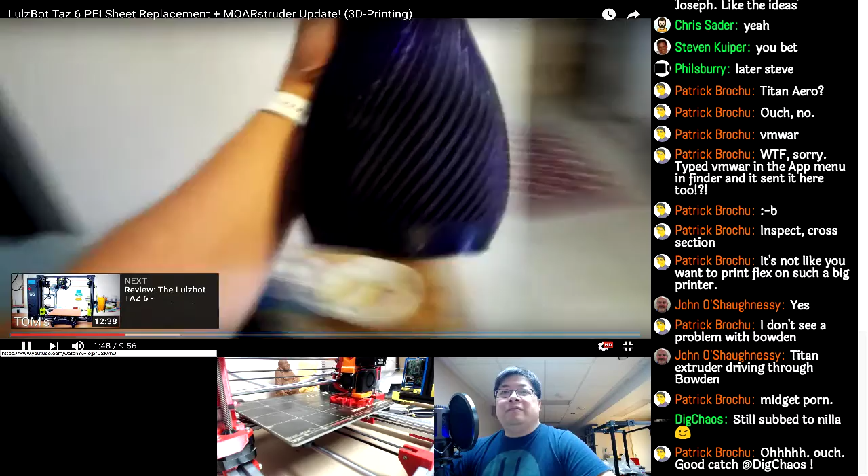Yeah, wonderful. Something like this, for example, took me 2 hours to print. Just so you can see how big it is on the machine there, that's about 2 hours right there to print something like that. So it's way faster than anything ever would have been before.

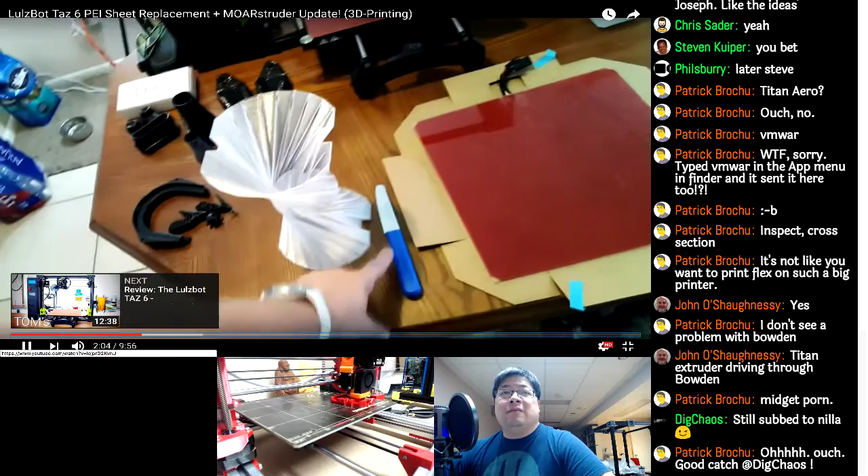Just for fun, I actually went into SketchUp and took this file, basically took a circular item and cut out a little piece. I pulled up and twisted it in the program and printed it out just to see what it would look like. Wow, I was amazed with how quickly and how fast it actually printed this guy.

So now I've got my own drum. Actually, what I use it for is I have to put the camera right here, doing little time lapses right there. So anyways, who knows what that could be used for? But a little storage device.

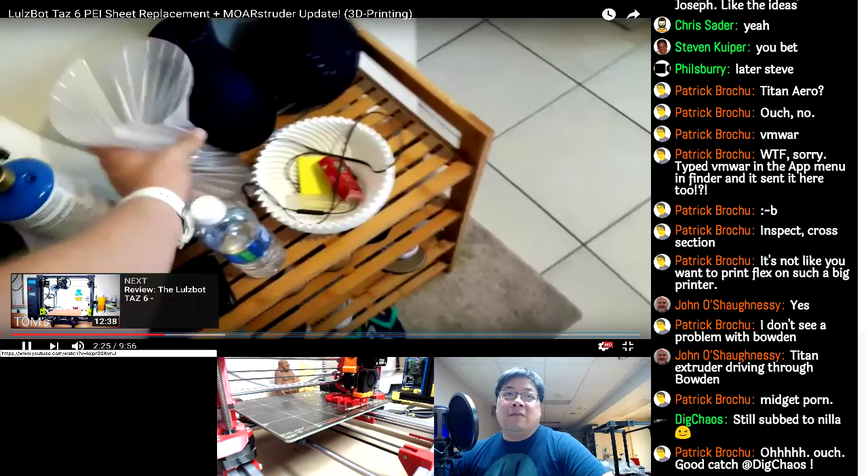And of course, we've got this guy right here, and he took just over 3 hours to make himself. It's a really cool looking piece, and it's just amazing that we can print these guys so quickly. I'll show definitely a bunch of time lapses if I can. But here we go.

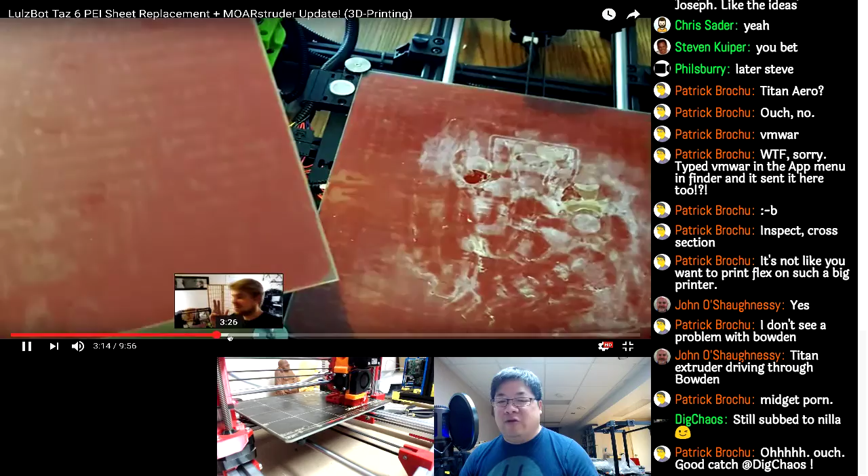Let's get to the interesting part. Basically, yeah, he totally gouged the crap out of that PEI, and he was going to talk about replacing it. Not about glue here, but...

We printed these parts, and I don't know if I could pause it enough to show you guys. Yeah, so look at, I mean, the layer lines on those are like... I actually like it because it's not like a perfect smooth print, but he just moved it a bit and it looks pretty good.

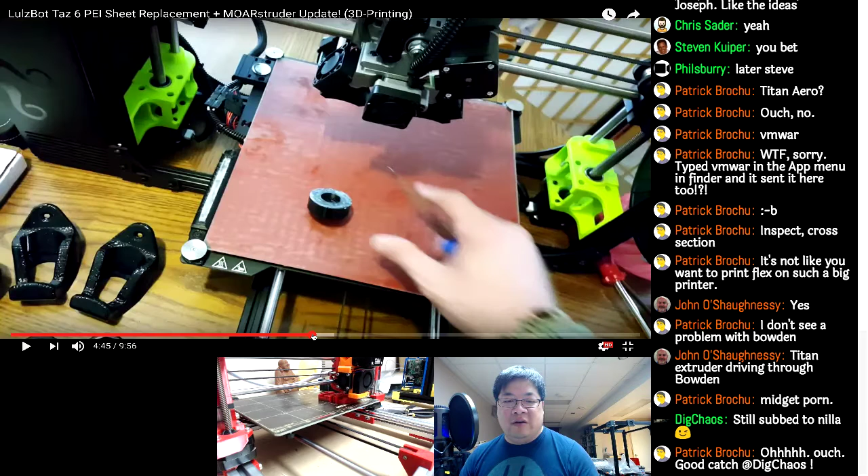I think going with 1.2 and printing those big faces and stuff like that makes a lot of sense. I think it'd be nice to do if we get a chance to get that working. So I was gonna show this one.

So basically, this heat bed is held down by four quarter-size corners, and there's a quick disconnect here, and a strain relief for the cable here. So I'm thinking we could probably do the same thing. Somebody could come up with a strain relief clamp for the MK2 or MK42 heat bed with the carriage, and then have quick disconnect for the thermistor and the power. These RC connectors we use are good for 30 amps, so that way he could quickly just remove the heat bed. See that right there, that's all we have to do is keep it this short and then have the rest of the cable coming out of that.

It's interesting to see. I think he shows it here. See here? That's all he does, there's a strain relief for it. Yeah, I think those are fairly common, right? So I think we'd be good with that.

This guy is very interesting because he sells these kits that allow him to mount - oh, there we go, this is where we could kind of... So he sells these VR sensors mounted on magnets, and he just basically takes them down when he needs to do adjustments. He prints and sells them online, and he's been pretty successful selling those kits.

Yeah, I wish they went with that instead of a hard wire that we have on the MK2. I wish they went with something like that.

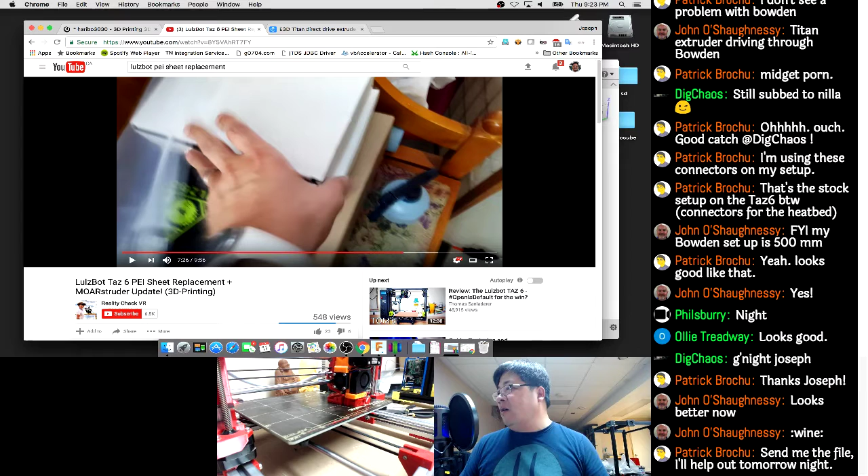Let's see, oh, MK42. So all the group buy orders should, like I said last time, have shipped out. The Tindie orders that were in up to Monday were shipped out. We added five new MK42 clones on the Tindie store, they were sold pretty much within a few hours, sold out again. Those are going out Saturday, so Matt's packing them up and we're getting them to go. We have another 25 coming, so if you need them, we will put them back in the store.

I had ordered more PEI for my own use from the Cruiser store. I think that's still the cheapest way to do it - it was $8 each, like 8.90 something each, and then $10 shipping. So by the time it got to me, it was $28 for two with UPS shipping.

So now I have to replace these two - this one I gouged yesterday, the other one I gouged last week. Still totally stupidly my fault, don't try to rush removing a large footprint print of PETG. Otherwise you just end up lifting the PEI, then when you slide the tool under it, you just slice right into your PEI. So yeah, not happy with that. I might try that filament print thing - everybody's telling me it's the way to go, so I might try that too.